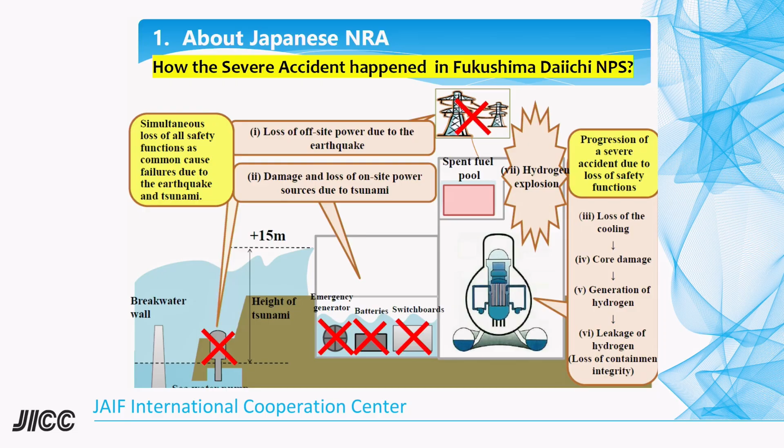The NRA was established as a regulatory reform following the Fukushima Daiichi accident. Before the accident, the regulatory functions existed in several locations, but after the accident, all regulatory functions were integrated into a single organization.

In addition, the regulatory body has been made independent from METI. METI is an agency promoting nuclear power generation.

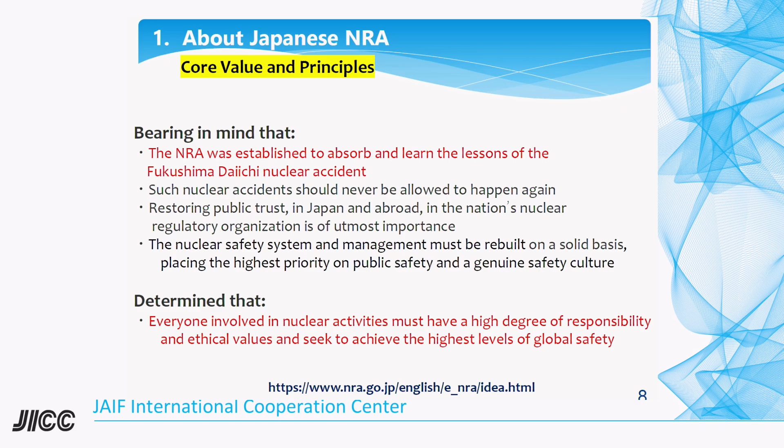Reflecting on the Fukushima Daiichi accident, the NRA created its core values and principles—for example, bearing in mind that NRA was established to absorb and learn the lessons of the Fukushima Daiichi nuclear accident, and determining that everyone involved in nuclear activities must have a high degree of responsibility and ethical values, and seek to achieve the highest level of global safety.

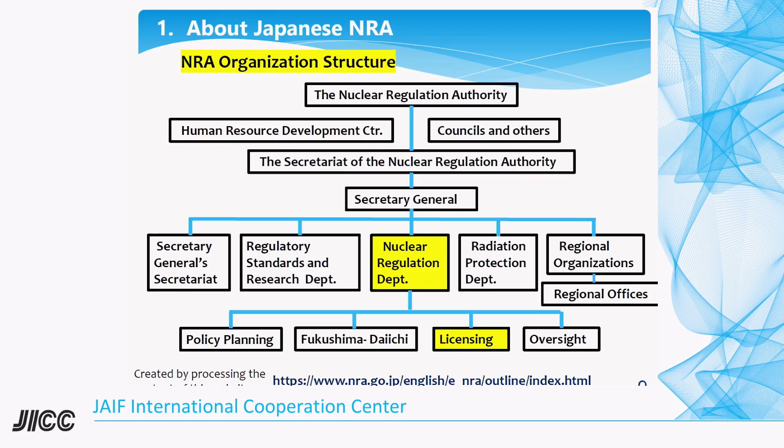This is the NRA organizational structure. The departments highlighted in yellow are responsible for licensing.

The following sheets describe the NRA's mission and principles. I'd like to introduce two key principles. One is independent decision making: the NRA shall make decisions independently based on the latest scientific and technological information, free from any outside pressure or bias.

The second is being an open and transparent organization. The NRA shall ensure transparency and appropriate information disclosure on regulations, including the decision-making process, and shall be open to all opinions and advice from Japan and the international community, avoiding both self-isolation and self-righteousness. So the NRA widely disseminates information to the public and media through regular press conferences and briefings, and also updates the latest information on their website in a timely manner.

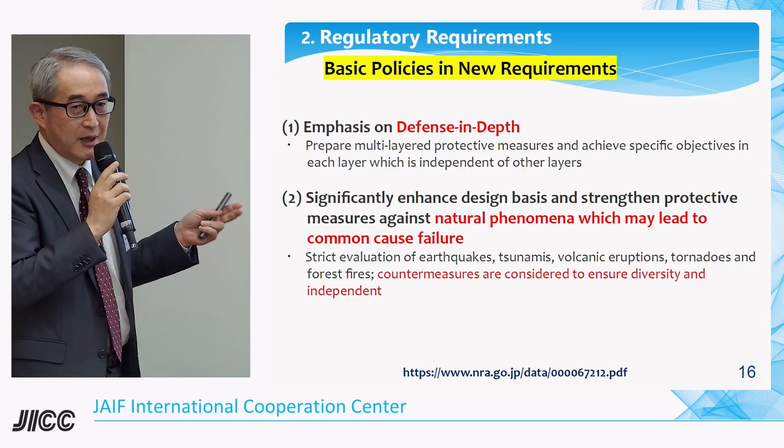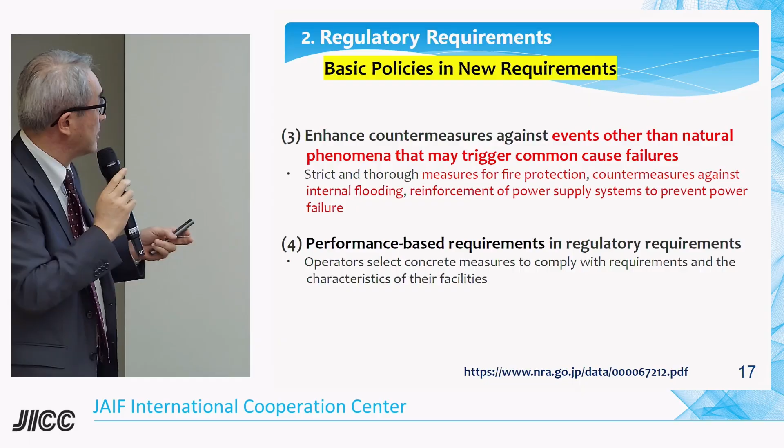So have you heard of the cliff edge effect? No.

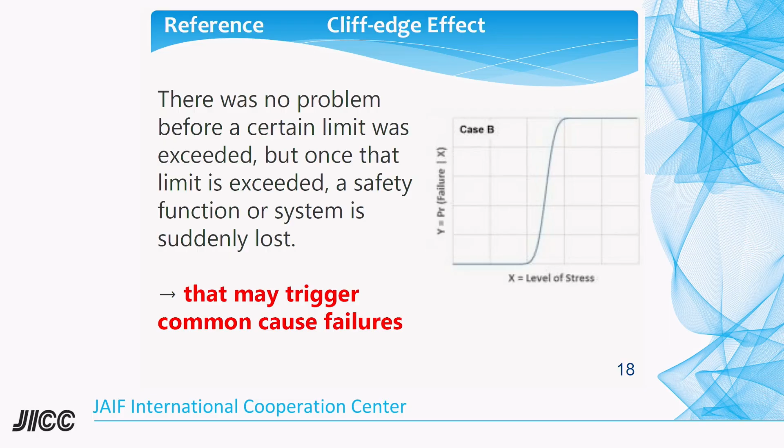There are several definitions, but simply stated: there is no problem before a certain limit is exceeded, but once that limit is exceeded, the safety function or system is suddenly lost. In the case of Fukushima Daiichi, the tsunami exceeded a certain height, causing the safety system to malfunction all at once. This cliff edge effect could happen not only due to natural phenomena, but also internal flooding and internal fires. So preventing the cliff edge effect is crucial in the design and operation of the nuclear power plant, and a very important point for regulation and operation.

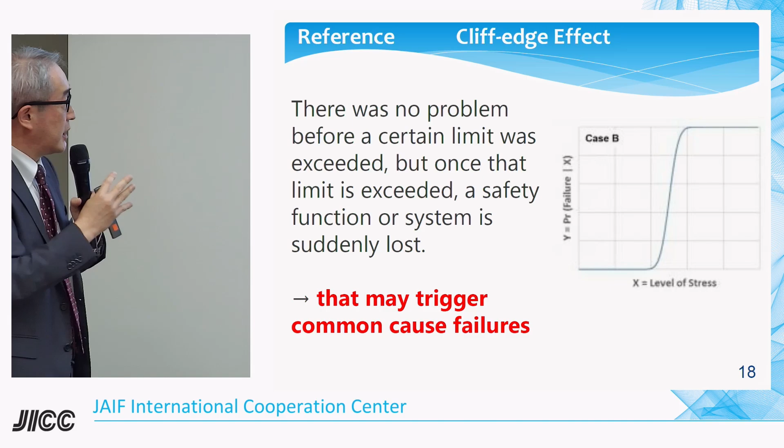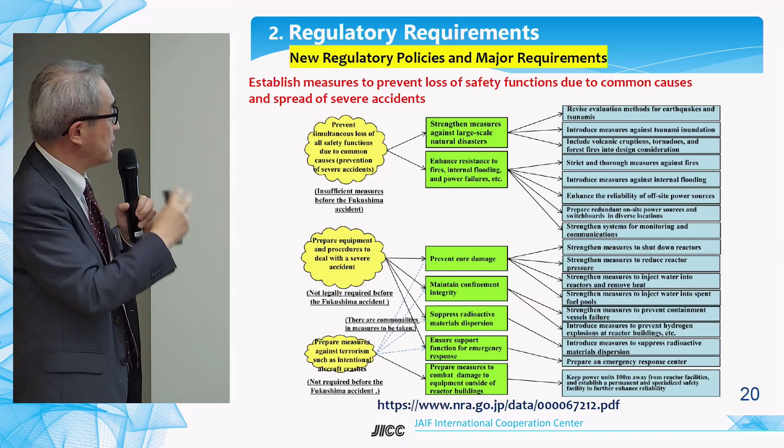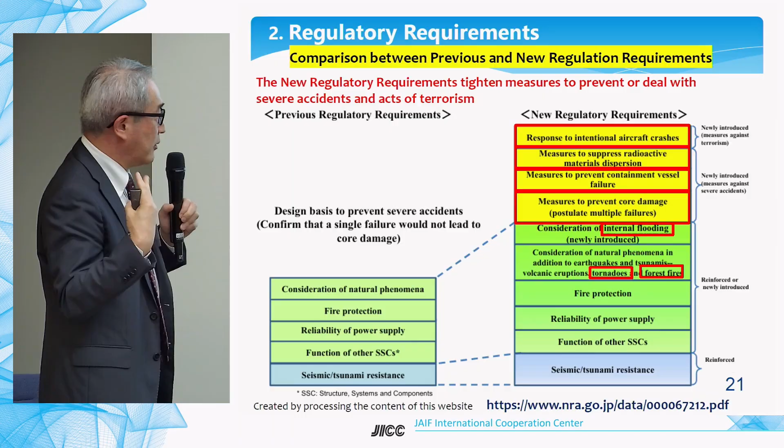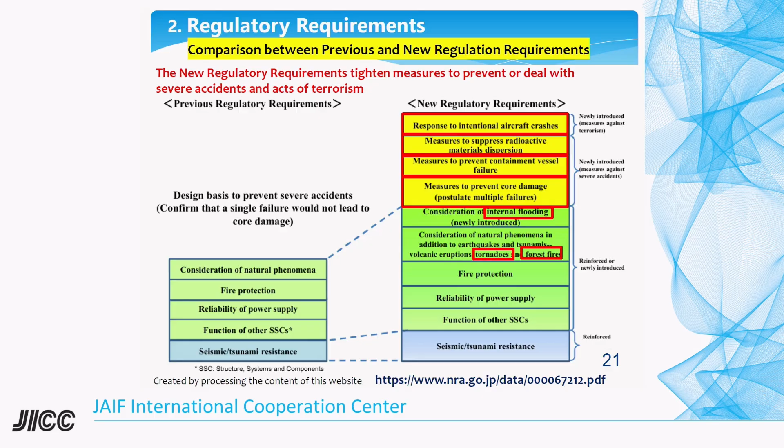This slide shows a comparison between the previous and the new regulation requirements. The former presentation already explained this, so I would like to explain the items marked in red squares: tornadoes, forest fires, internal flooding, measures against severe accidents, and measures against terrorism.

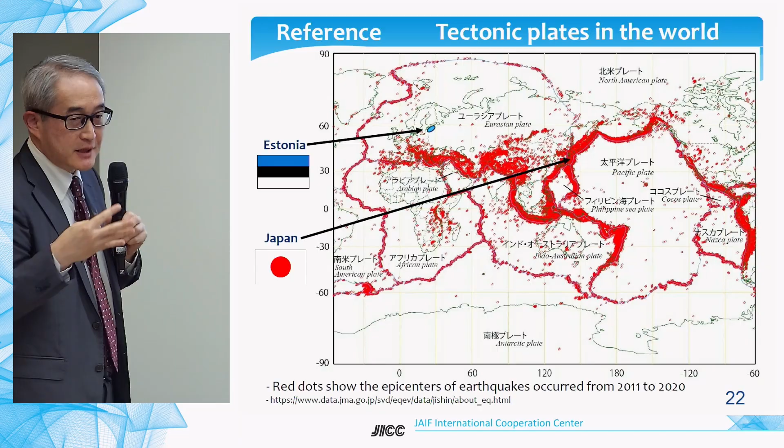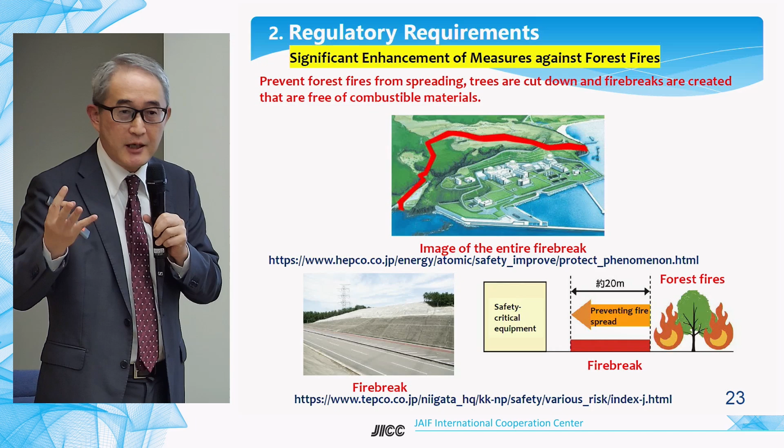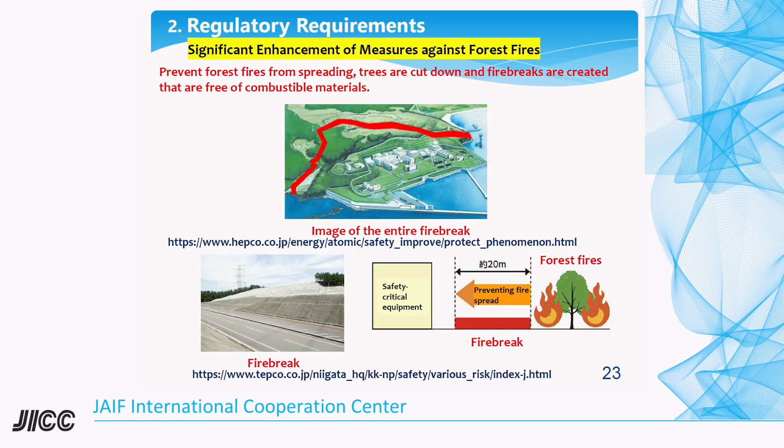I heard that your country sometimes experiences forest fires, right? To prevent a forest fire from spreading, trees are cut down and fire breaks are created that are free of combustible materials. The upper figure shows an image of the entire fire break system in the nuclear power stations - the red line - and the bottom left photo shows the Kashiwazaki-Kariwa fire break. You can see the trees cut down and combustible material removed. I think this could be a reference for your country.

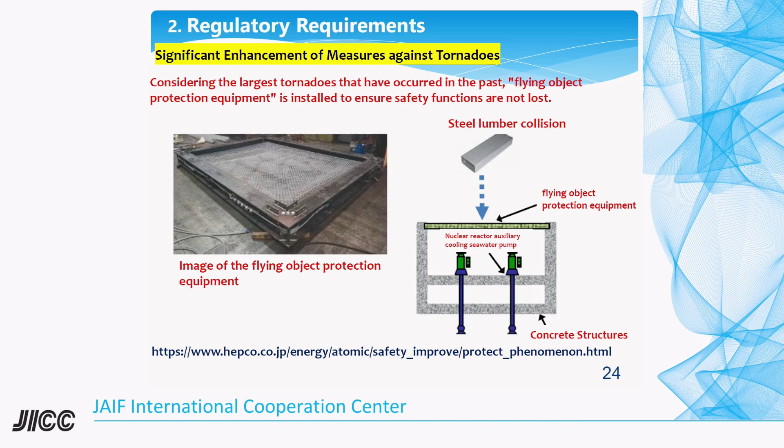My understanding is that your country has less experience with tornadoes, right? But strong winds sometimes blow in your country. Considering the largest tornado that has occurred in the past, flying object protection equipment is installed to ensure safety functions are not lost. These are images of the flying object protection equipment that protects the safety functions. This could also be a reference for your country.

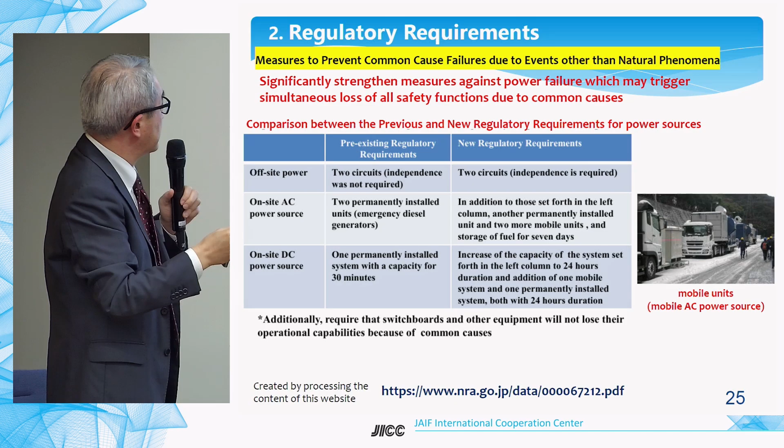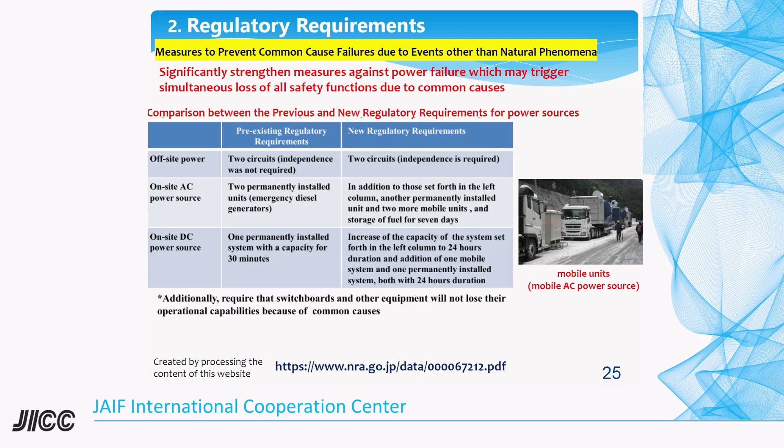This table shows the comparison between the previous and new regulation requirements for power sources. I'd like to skip reading out these descriptions, but compared to the previous regulatory requirements regarding off-site power, on-site AC power sources, and on-site DC power sources, the new regulation requires independence, diversity, and multiplicity.

As I mentioned, internal fire could trigger common cause failures. So the new regulations require measures to prevent fire, measures for fire protection. The new regulation requires the use of non-combustible material for cables installed in structures, systems, and components with safety functions. Non-combustibility is confirmed by a verification test. This photo is a sample of the verification test for the self-extinguishing performance of the non-combustible material - this is a vertical flame test.

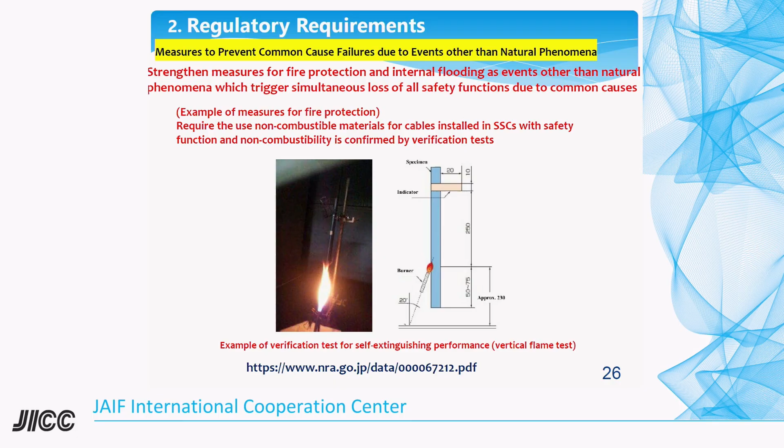Internal flooding may trigger common cause failures. So the new regulation requires strengthened measures for internal flooding.

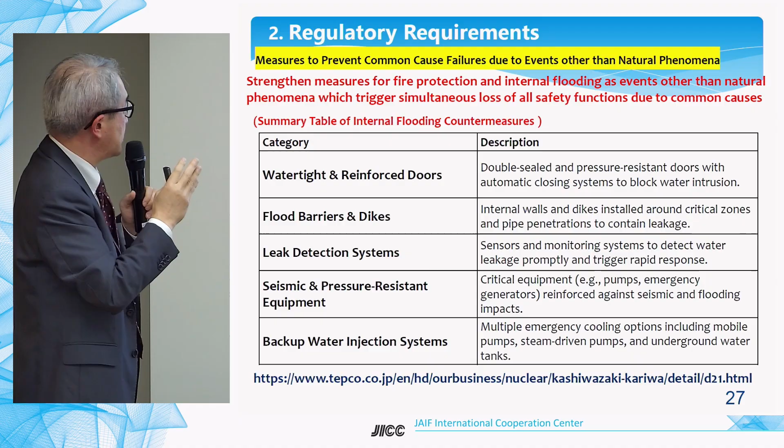I'd like to skip reading out the detailed description, but it requires, categorically, watertight reinforced doors, flood barriers and dikes, and leak detection systems, and especially in Japan, seismic measures, but you don't necessarily need the seismic. Pressure resistant equipment and a backup water injection system are required.

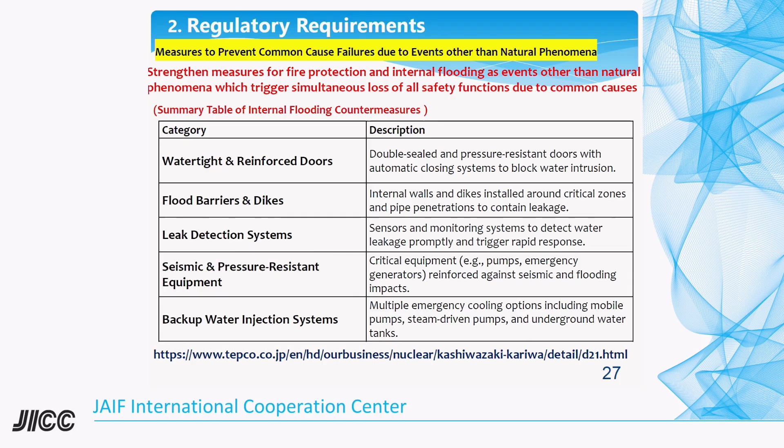The following three sheets describe measures for a severe accident. This slide shows measures to prevent core damage. The new regulation requires measures to prevent core damage.

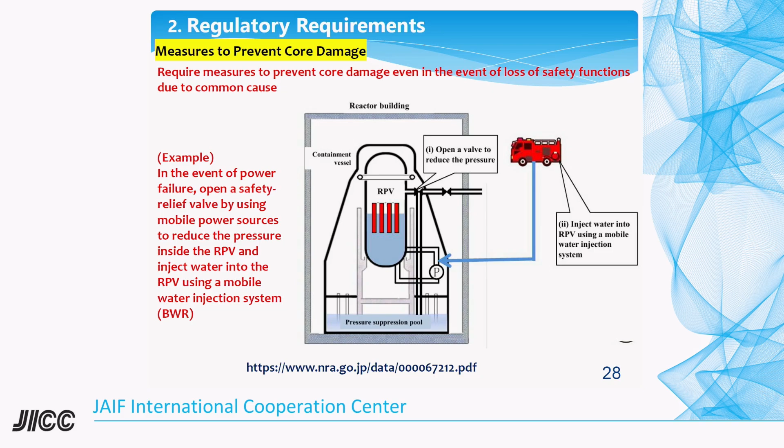Even in the event of loss of safety function due to common cause failure, for example, as for the BWR, in the event of power failure, open the safety relief valve by using a mobile power source to reduce the pressure inside the RPV, and inject water into the RPV using the mobile water injection system.

The second is measures to prevent containment vessel failure. The new regulation requires measures to prevent containment vessel failure in the event of core damage. For example, number one is installing a filtered venting system to reduce the pressure and temperature inside the containment vessel and reduce radioactive material while exhausting.

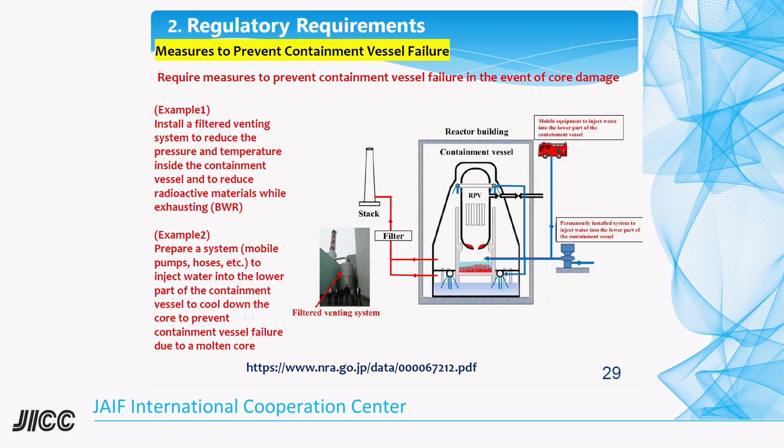Example number two is preparing a system, a mobile pump and hoses, to inject water into the lower parts of the containment vessel to cool down the core, to prevent containment vessel failures due to molten cores.

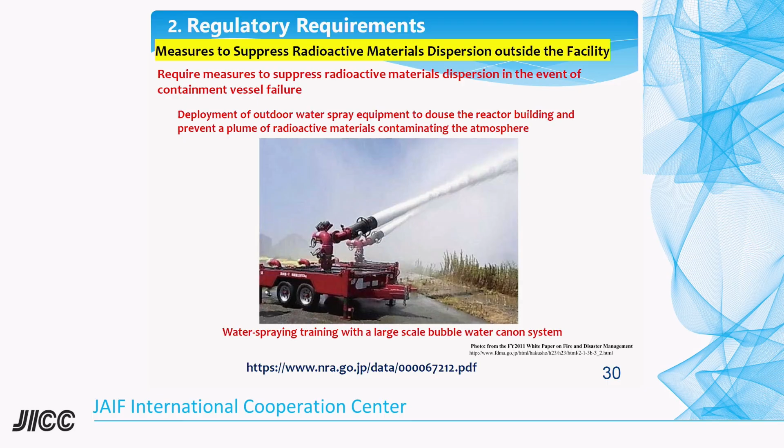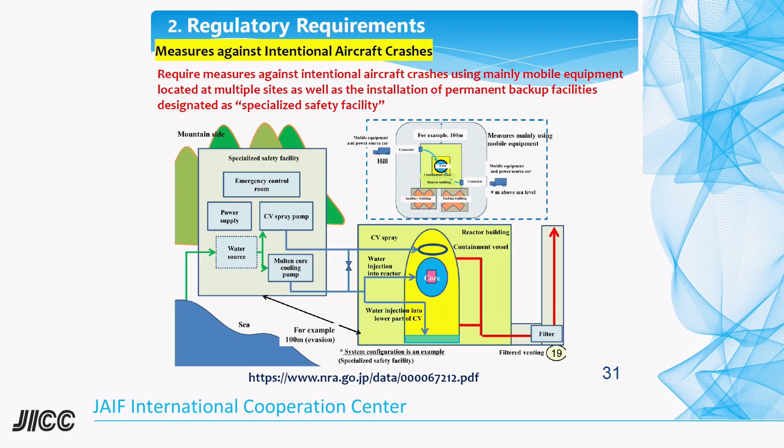My understanding is that regulation against terrorism varies around the world. This is a Japanese example, but there are few countries that require permanent backup facilities designated as specialized safety facilities. So I think it is important to look at global regulation to find the appropriate one suitable for your country. This is just one example, the Japanese example.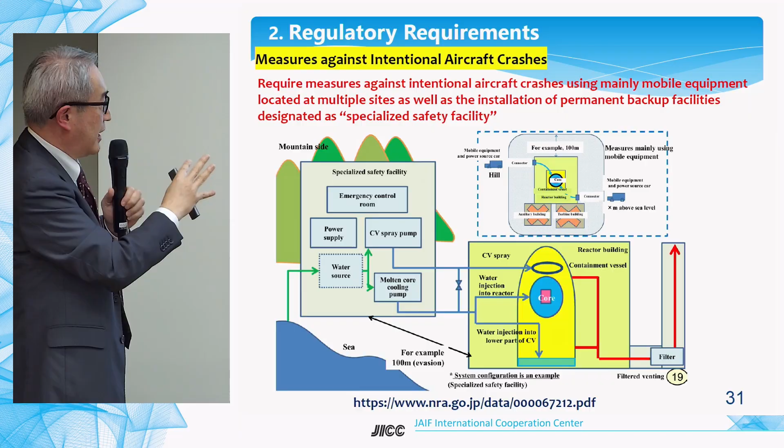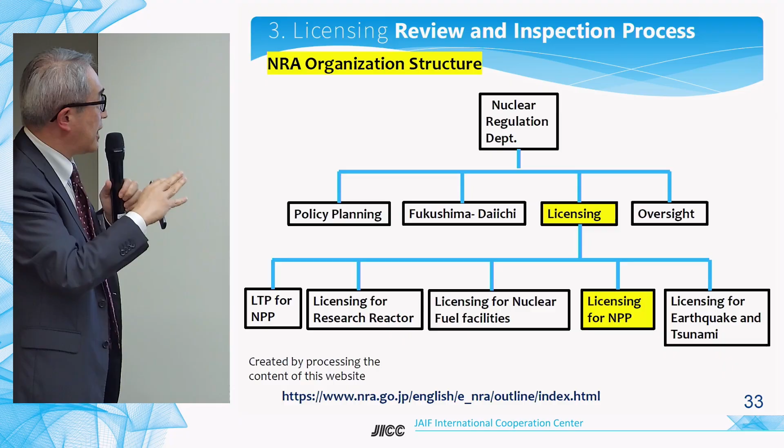Okay, I'll move on to the licensing, review, and inspection process. Under the licensing department, there are five sections. The licensing section for the nuclear power plant, highlighted in yellow, is in charge of the licensing, review, and inspection process for the nuclear power plant.

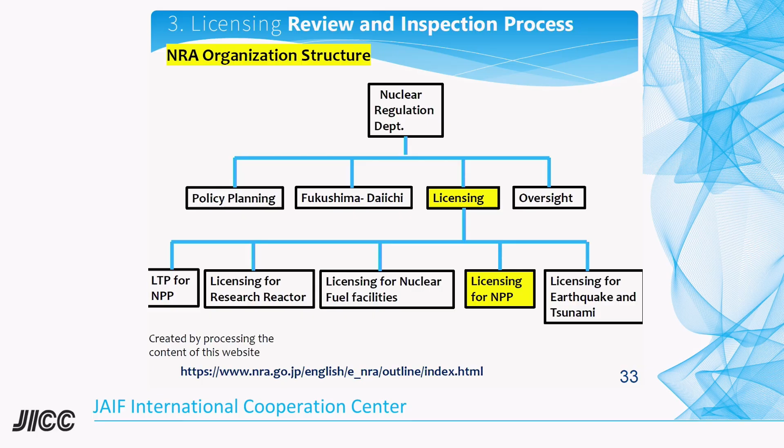I'll introduce that licensing, review, and inspection process very briefly. For checking conformity with the new regulatory requirements, the applicant will submit three applications: number one is a reactor installation license, number two is a plan for construction works, and number three is the operational safety program.

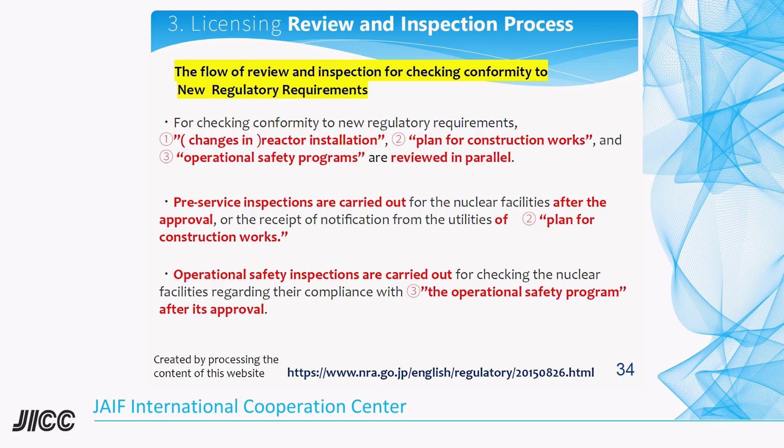After that, these applications will be reviewed by NRA in parallel. After approval of number two, the construction works plan, pre-service inspections are carried out. Also after the approval of number three, the operational safety program, operational safety inspections are carried out.

This diagram shows the flow of the conformity review for the new regulatory requirements. The left side shows the NRA's process, and the right side is the applicant's process.

The new regulatory requirement was enforced in July 2013, and the applicant submitted the three applications: the reactor installation, the plan for construction works, and the operational safety program. After that, NRA will review these applications in parallel.

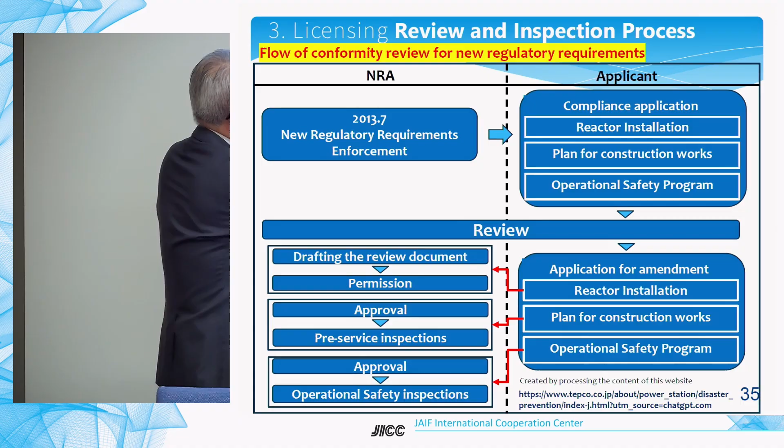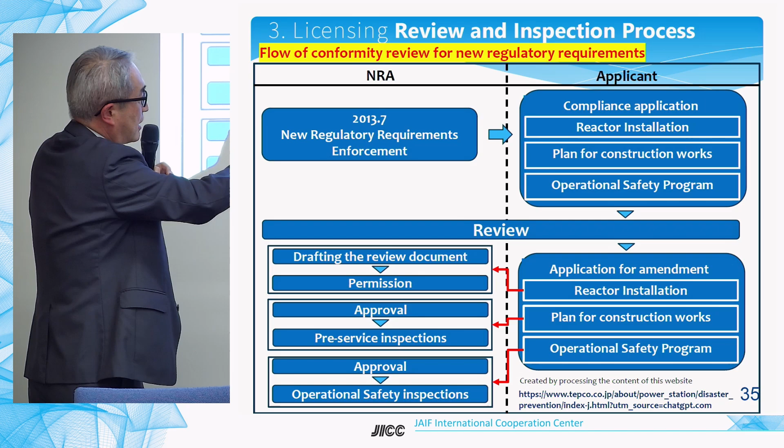As I mentioned, after that the applicant will amend these applications according to the NRA's findings and comments. This NRA review and applicant amendment process sometimes repeats, especially in cases where there are deficiencies in the application documents.

After that, NRA will create a draft review document, and finally give permission to the applicant regarding the reactor installation. Regarding the plan for construction work and operational safety program, NRA will give approval to the applicant, followed by the pre-service inspection and operational safety inspections, which will be carried out by the NRA.

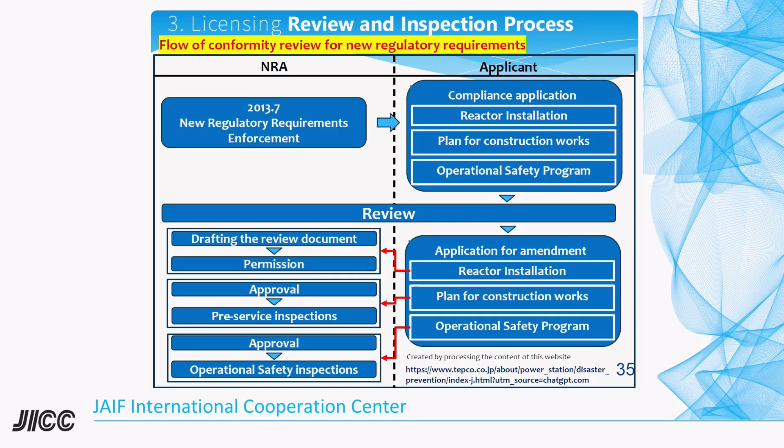So this is the summary of the licensing, review, and inspection process.

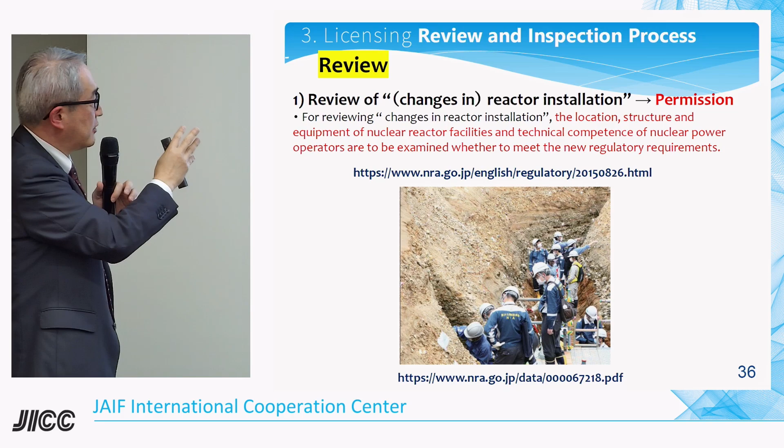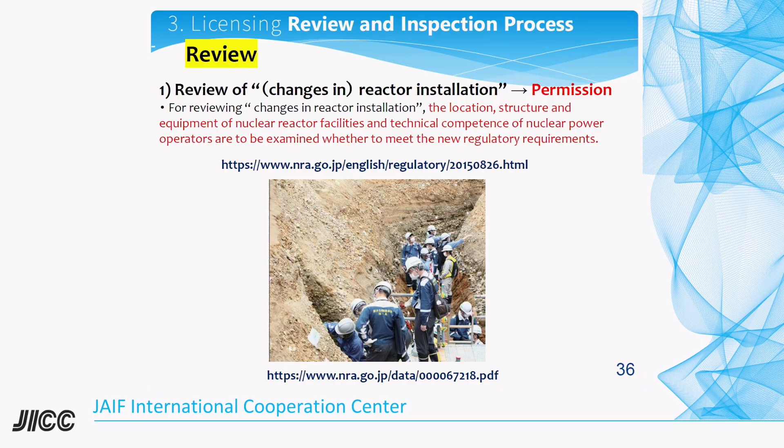geological survey to confirm the possibility of an active fault. In Japan, important facilities of the nuclear power plant shall not be placed on an active fault. So this process is the most time-consuming process in the

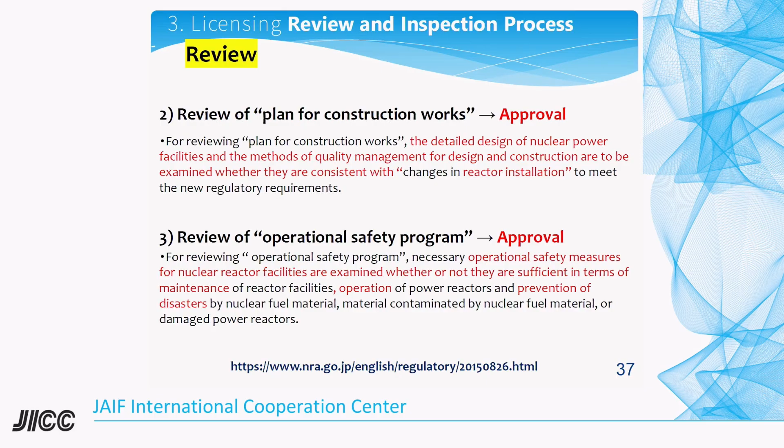licensing review process in Japan. Regarding the plan for the construction work, the detailed design of the nuclear power facilities and the method of quality management for design and construction are examined, to check whether or not they are consistent with the reactor installation permission. Regarding the operational safety program, the operational safety measures for the nuclear reactor facilities are examined to check whether or not they are sufficient in terms of maintenance, operation, and the prevention of disasters.

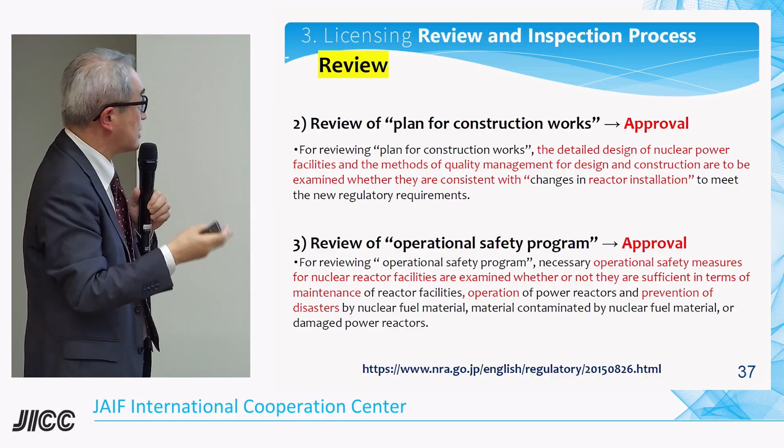In the inspection process, regarding pre-service inspections, NRA nuclear facility inspectors examine the nuclear facilities to confirm conformity to the plan for construction works and the technical standards. These inspections involve comparison of the drawings with the actual products, and testing the devices and

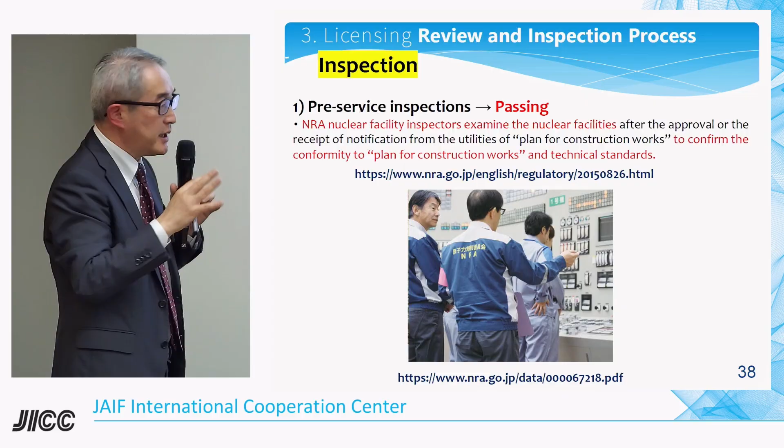systems to verify their functionalities, and also pressure and leak tests, and checking the operation of the I&C system, the instrumentation and control system. So these inspections mainly focus on hardware inspection.

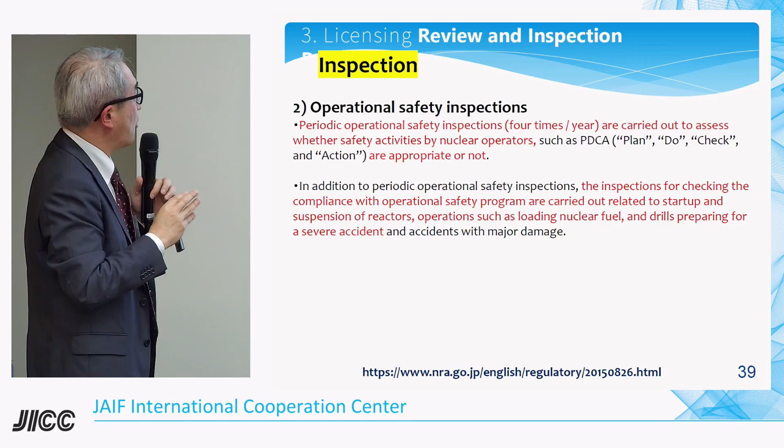Regarding operational safety inspections, there are two types. One is periodical operational safety inspections, which are carried out to assess whether or not the safety activities by operators are appropriate. The second is inspections for checking compliance with the operational safety program, carried out related to the startup and suspension of reactors, operations such as loading nuclear fuels, and drills preparing for a severe accident. So these inspections mainly focus on the soft aspects of the operations.

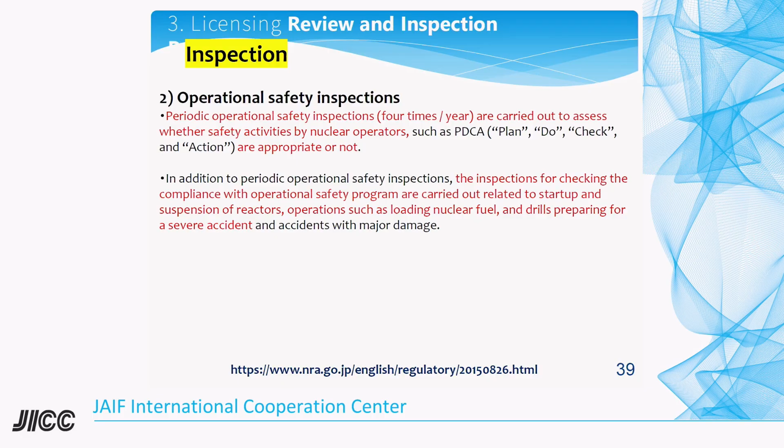This includes organization and responsibilities, operators' qualification and training programs, documents and procedures, safety culture, and the audit system — these kinds of things are inspected by the operational safety inspections.

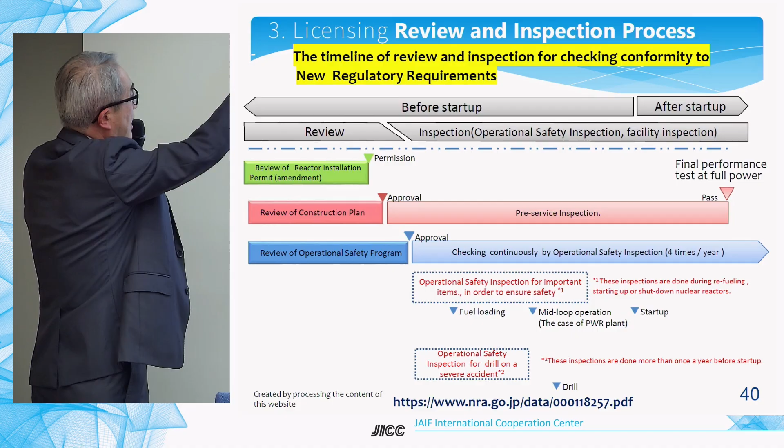So this is a timeline of the review and inspection for checking conformity to the new regulatory requirements. As I mentioned, the 3 applications were submitted, and after that comes the permission and approval, and after that a pre-service inspection will be carried out.

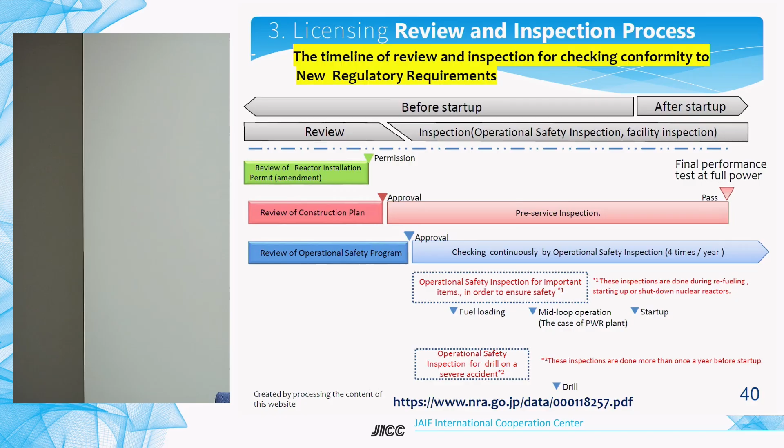The pre-service inspection will be finished after the completion of the final performance test at full power, to verify whether or not the nuclear power plant functions work as designed at the rated output.

Regarding operational safety inspection, it will continue even after commercial operations begin. Before operation, the special inspection will be carried out at the timing of fuel loading and startup. The inspection for the severe accident drill will be carried out more than once a year before startup. So this is the summary and timeline of the Japanese licensing review and inspection process.

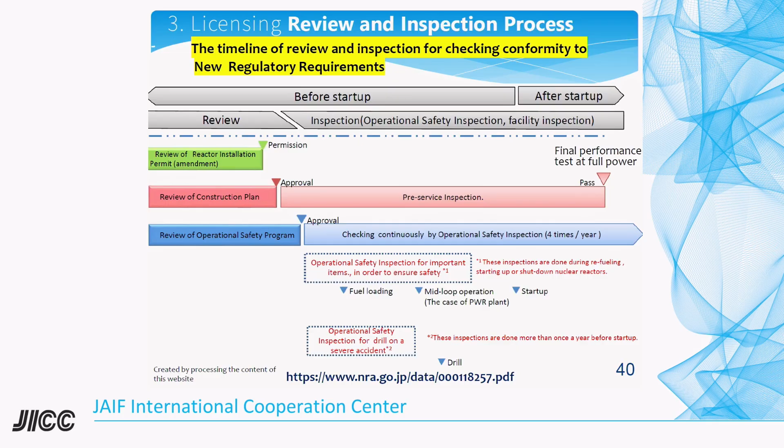In Japan, the new regulatory standard has not been applied to newly established nuclear power plants. However, it is being applied to existing nuclear power plants for restarting.

This is the first case, at Sendai Unit 1, which is a PWR. The Kyushu Electric Power Company submitted these applications in July 2013, and the plant was restarted in September 2015. The period from application to restart is about 2 years.

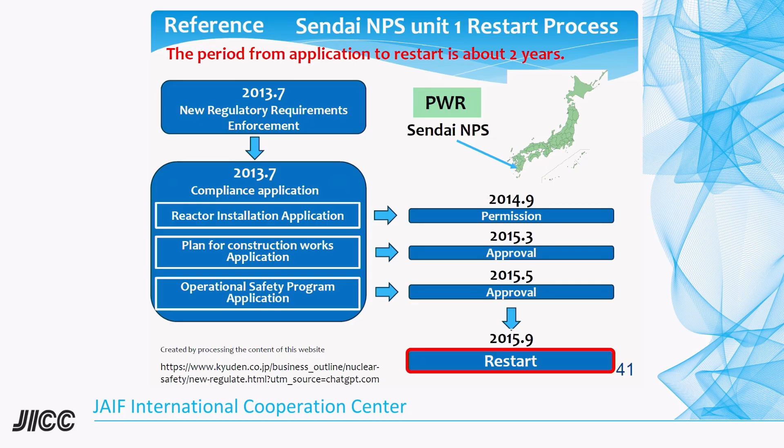This is a BWR case. At Onagawa Unit 2, the Tohoku Electric Power Company submitted these applications in December 2013, and the plant was restarted in November 2024. The period from application to restart is about 11 years — a very long period.

Also, the Onagawa Nuclear Power Station didn't suffer a severe accident, but several damages occurred due to the Great East Japan earthquake, and it took a long time to repair these damages, and also to reinforce the plant to be earthquake and tsunami resistant.

In addition, Onagawa Unit 2 is a BWR, the same type as Fukushima Daiichi Nuclear Power Plant. So the review and inspection process took longer than for the PWR.

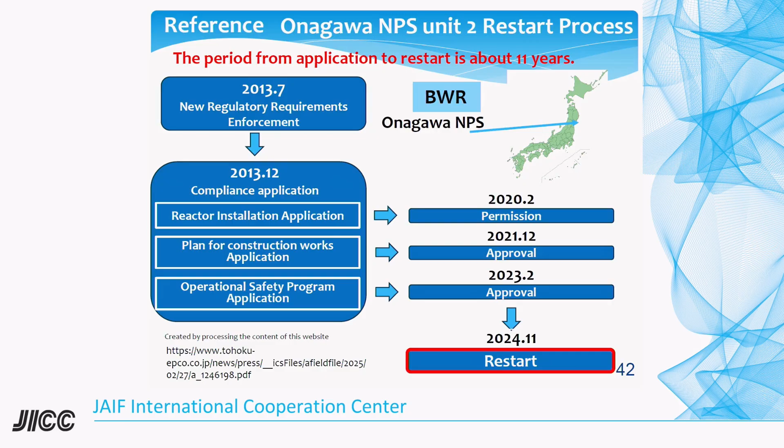So even for a PWR, in the case of Tomari Unit 3, the period from application to reactor installation permission was about 12 years.

The reason the review process took so long is the prolonged geological survey to verify it's not an active fault, and there were several deficiencies in the application document, which led to repeated amendments.

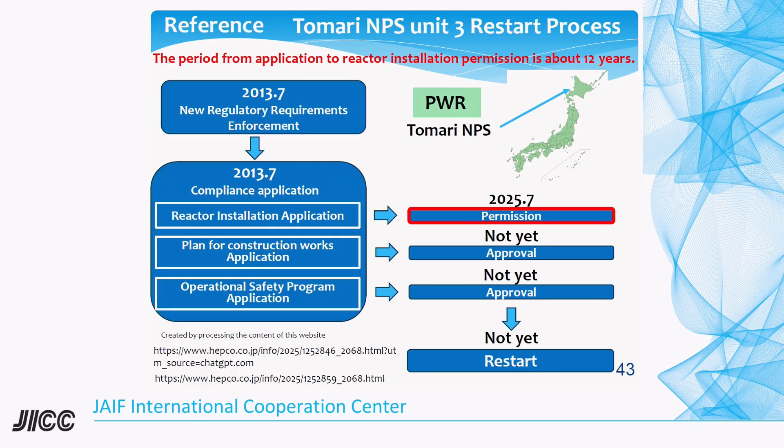From this point of view, to shorten the review period, it's important to make sufficient preparation to ensure the description in the document is based on scientific and technological data, and to have fewer deficiencies. These are lessons learned to shorten the review period.

So this is for your reference. As I mentioned, the new regulatory standard does not apply to newly established nuclear power plants. This is a typical workflow for the preparation of nuclear power plant construction in Japan before the Fukushima Daiichi accident.

The construction period varies, but is about 5 years. The licensing period depended on the situation - if there were many technical issues or first-of-a-kind technology, the licensing period was prolonged, but if there were fewer technical issues, the licensing period was shorter. So it depends on the situation.

But before the Fukushima Daiichi accident, this is the structure of the entire work for newly established nuclear power plant construction in Japan.

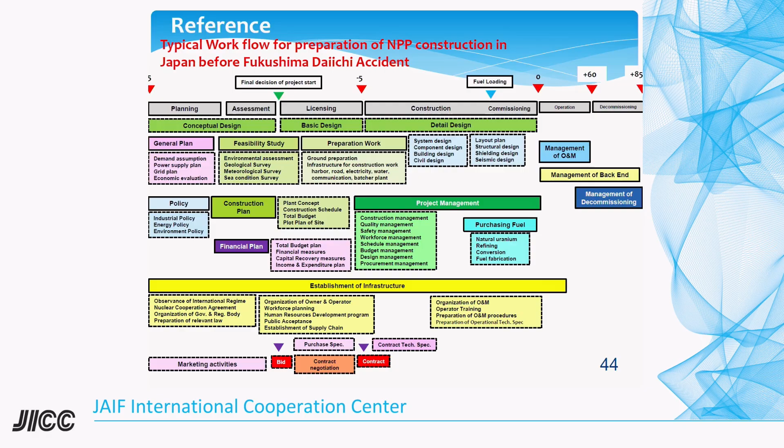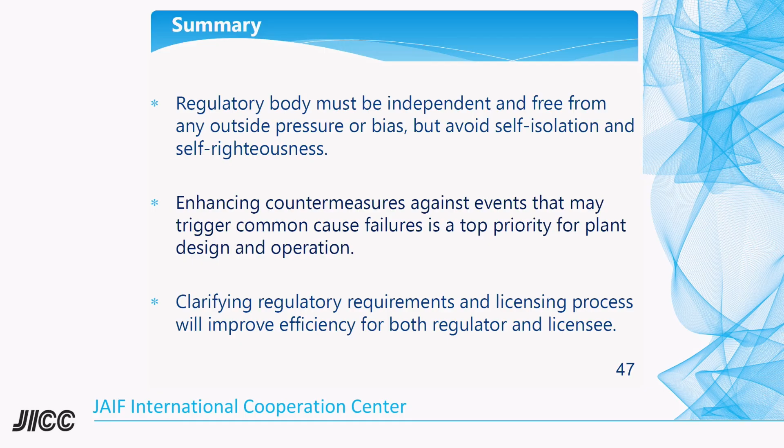In summary, first, a regulatory body must be independent and free from any outside pressure or bias, but avoid self-isolation and self-righteousness. So being independent and not isolated is a core value.

The second point is that enhancing countermeasures against events that may trigger common cause failure is a top priority for plant design and operation. This is a very important point for both the operator and the regulator.

And the third one is that clarifying regulatory requirements and the licensing process will improve efficiency for both the regulator and licensees. Yamashita-san just mentioned cost overrun.

One of the causes of cost overrun is uncertainty of the regulatory requirements and licensing process, especially in cases where the regulatory requirements or licensing process change during the licensing review and inspections. In this case, cost overrun is highly likely.

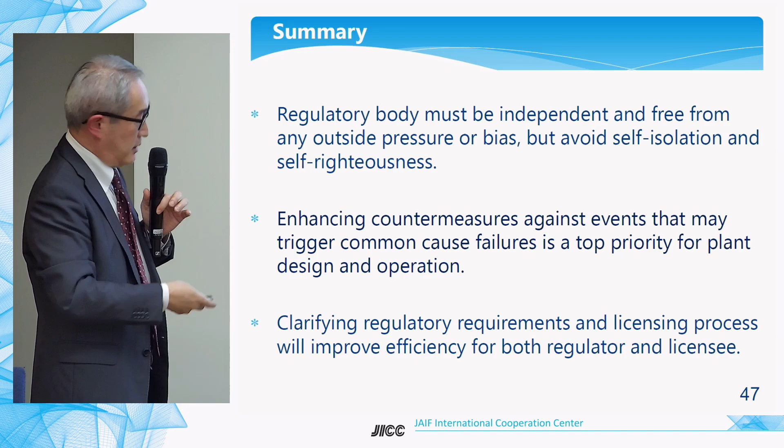Okay, thank you for your attention. I hope the information I have mentioned will be useful for your future nuclear power projects. Thank you.

Is there any question? Easy question. Yeah.

Chris Cannon with Sargent & Lundy. So you have a great deal of experience, and my questions are really revolving around your interactions with the regulatory aspects before and after the reorganization following the Fukushima accident. How do you feel the regulator is now compared to their effectiveness before?

Before the Fukushima Daiichi accident, the regulatory process was not so transparent. After the Fukushima Daiichi accident, the whole process, including discussions with the licensee, is open to the public and posted on YouTube every time, so everyone can watch it. It's very open and transparent, and independent from promoting nuclear power. It's totally different from before compared to now.